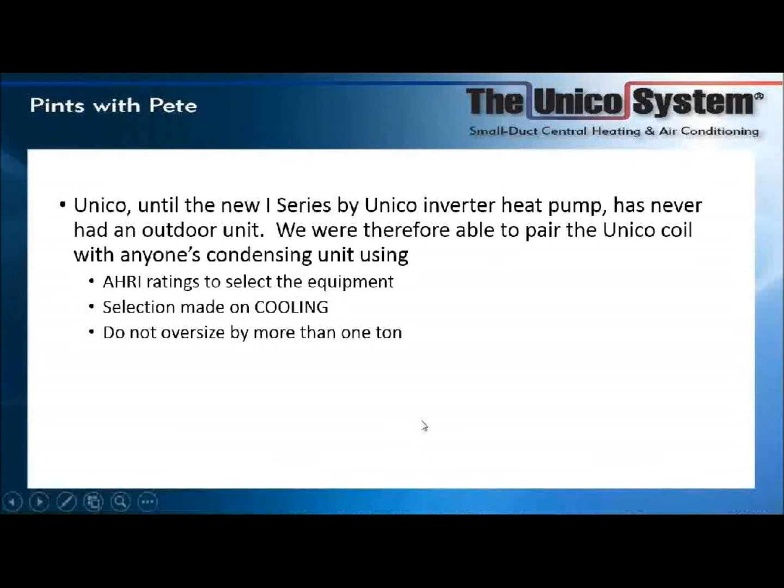And again, the thing is, a BTU is a BTU. One of the rules in our industry, this goes back to, I guess, when Willis Carrier was a child, is the sensible capacity - and I think you're all familiar with the terms sensible capacity and latent capacity. Sensible capacity is the temperature we feel. What we would do is take 1.08 times the CFM of air times the delta T, that is the difference between the incoming air and the outgoing air. That would give us our sensible capacity.

So when we give you a load calc, when we do jobs - when Victor Carroll does his website, does his load calculation for you - that's done in sensible. So we take that and multiply it by 1.3, or divide by 0.70. Now, we've always had a lower sensible heat ratio. We use about a 0.62 ratio. It used to be, before the advent of high SEER, the conventional systems also had about a 0.70 sensible heat ratio. That's risen to as high as 0.80 today. We're going to talk about that in just a moment.

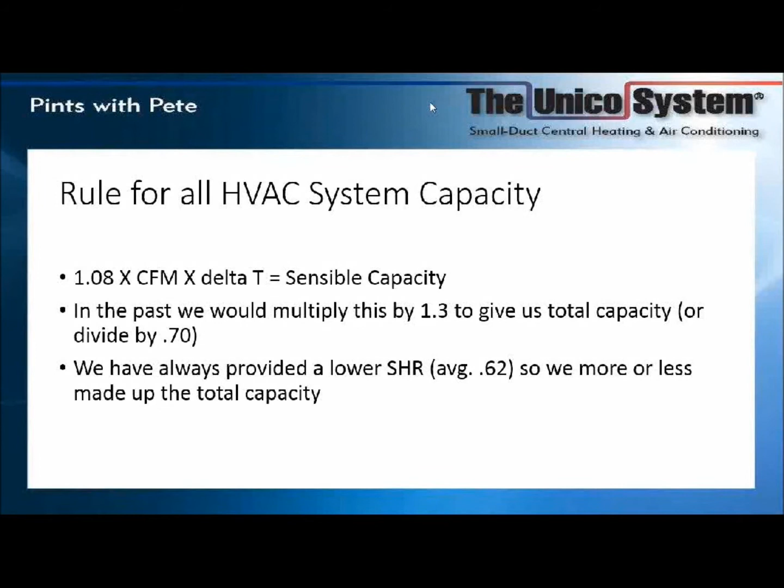So again, the first thing that you do is select the heat load capacity. And the AHRI ratings are 95 outside, 67 degrees inside. By the way, guys, I hate to mention this, but there are people out there that want to keep their house at 65 degrees during the summertime. Well, somebody needs to gently explain to them that's not air conditioning anymore.

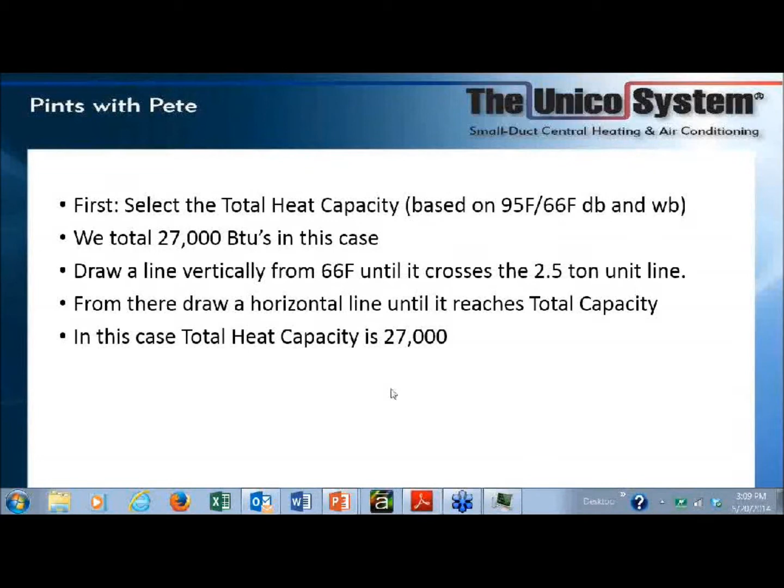So what we have in the next slide is a capacity chart. Pretty rare that we use these around here. But what we do is we take a vertical line from right here where it says 67 degree wet bulb. We pull this up to our 2.5-ton condensing unit, and that gives us roughly 27,000 BTUs. So that's how we determine the load.

Again, don't use this too often.

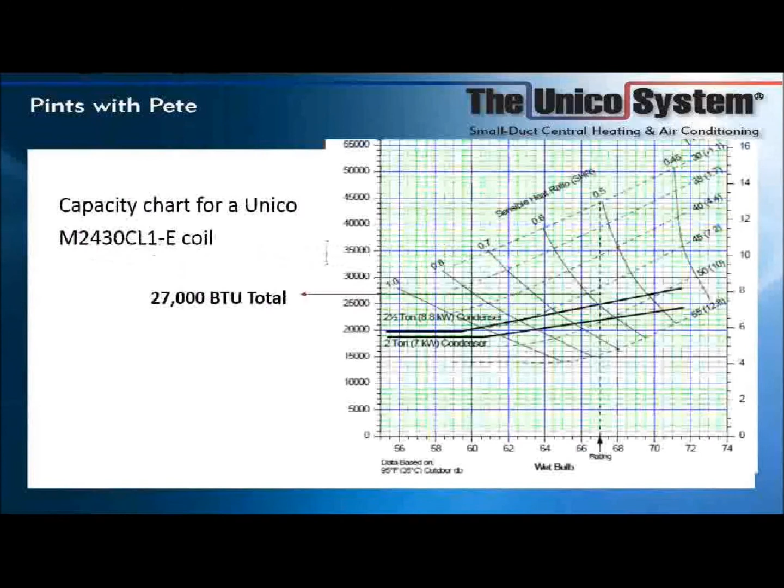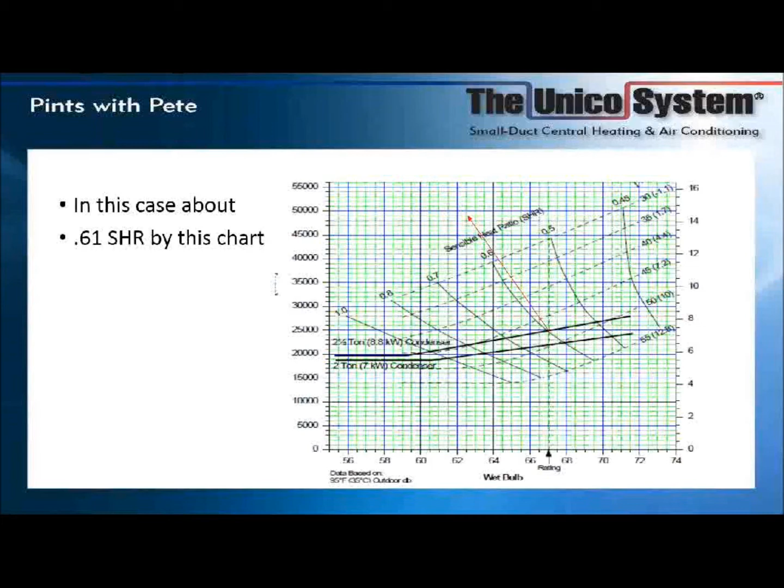The other part this chart shows is the actual sensible heat ratio. That can vary a little based on the condensing unit you're using, somewhere from about 0.6 to 0.62. In this case, you notice the line crossing the sensible heat ratio at 0.61, which is a little low for today's units—they're probably closer to 0.62. But you are taking out more humidity with Unico, which is a big plus almost everywhere, except a couple of places with dry climates, which we'll discuss later.

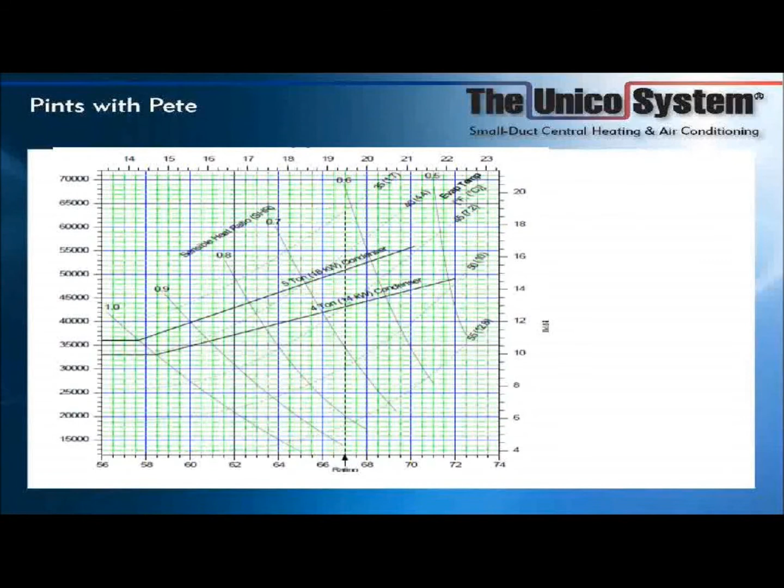Here's a capacity chart for the biggest coil we make, the 4860. In reality, this reflects a philosophy from Craig Messmer, our Director of Engineering: nominal condenser size is the size that manufacturer hopes the system produces. With us, a 2.5-ton system is rated at about 25,000 BTUs, whereas a conventional system matchup is more like 27,000 BTUs. In either case, you're not getting 30,000 BTUs from a 2.5-ton condensing unit, so it's a bit of a fiction the industry has agreed upon with nominal tonnages.

Quite frankly, if I'm doing a load calculation and come out with 24,000 or 25,000 BTUs, I'll probably just go to a 2.5-ton system so I don't get complaints on the 100-plus degree day that they can't keep the house at 68 degrees.

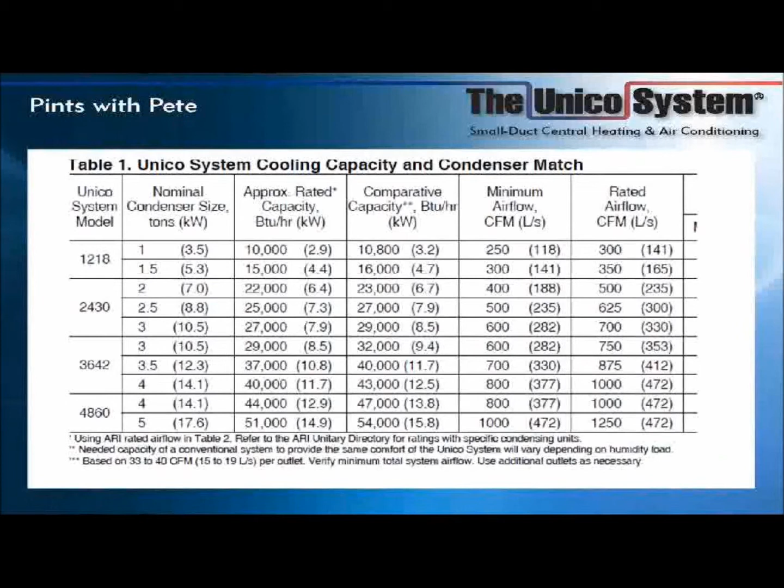So these are your expected figures, and this is, by the way, in our bulletin 40-40. There's a wealth of information there.

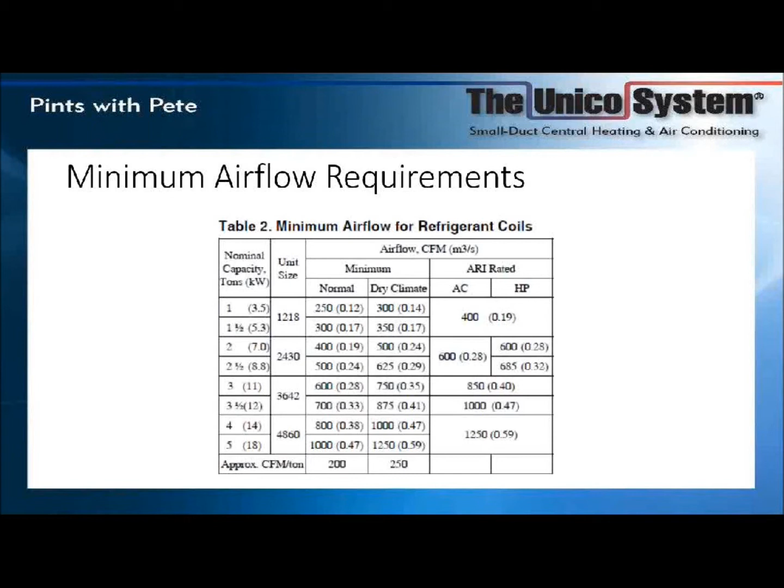If you've been to the other Pints with Pete sessions, you know this is very important to us—we have to have the correct airflow over the system. Over the last 20-plus years, the industry has mandated higher SEER: 10 SEER in 1992, then 13 SEER around 2006, and they're looking at even higher SEER now. What that's meant overall is smaller compressors and larger coils.

Here's something you wouldn't know unless you were with a manufacturer: the evaporator coil temperature on a conventional system has risen about 4 degrees, from around 44 to about 48 degrees. The discharge temperature, which we used to figure at 30-plus ambient when I was in school 35 years ago, is now about 15 to 20-plus ambient. The big thing people notice is that evaporator coils, both outside and inside unit coils, have become much larger, while we've stayed the same.

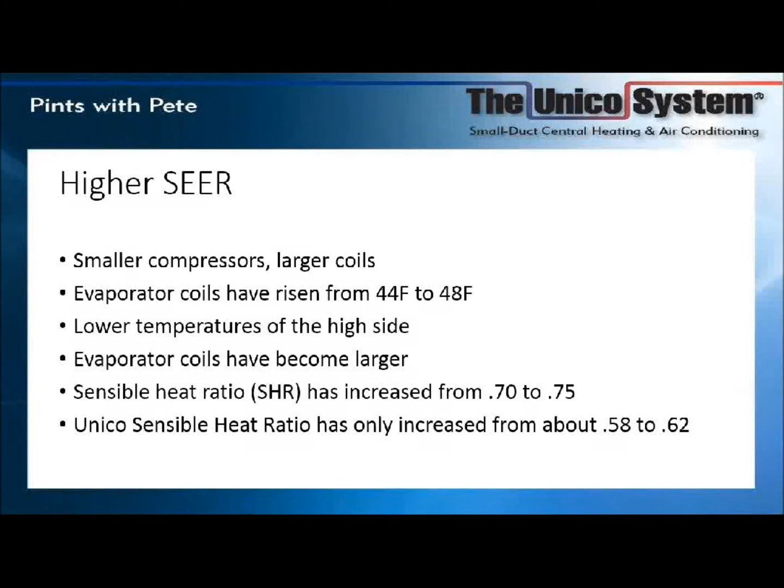So the sensible heat ratio has risen to about 0.75, maybe even a bit higher. Remember, we've only increased our sensible heat ratio slightly, from about 0.58 to 0.62, and our temperature has only slightly increased, from about 42 to 44 degrees.

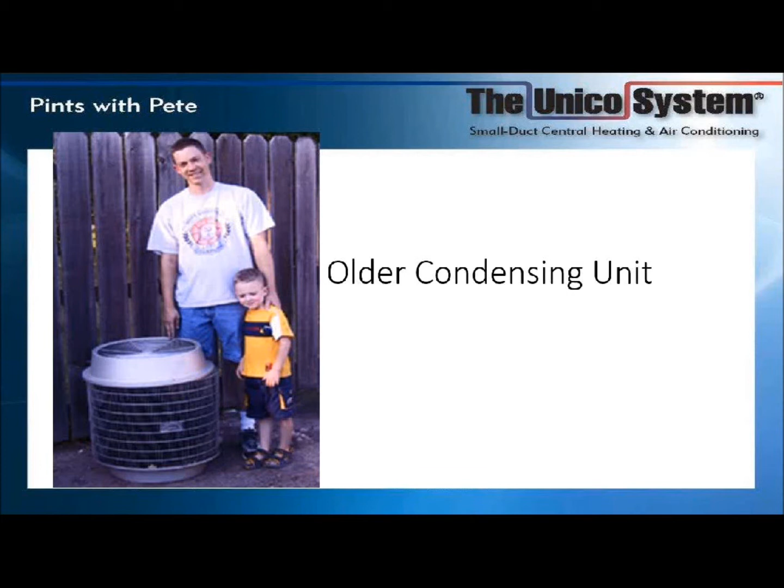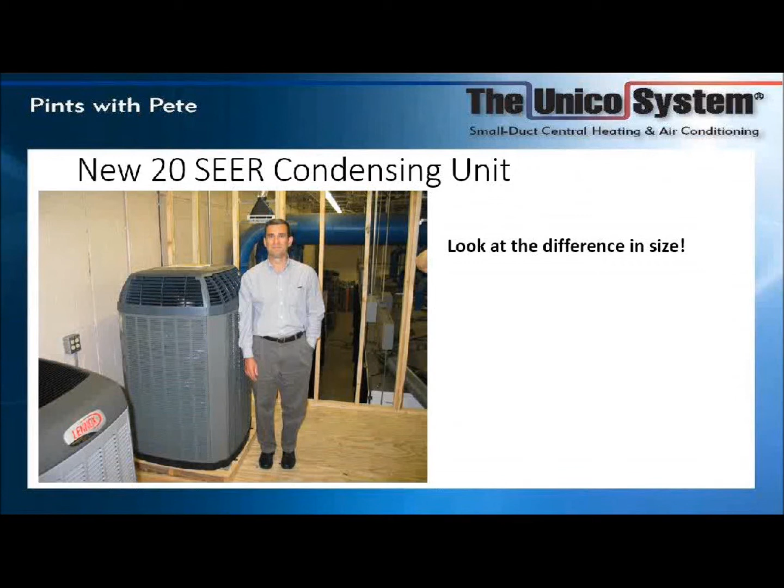So this kind of brings it home. I don't know how many of you were in the industry back in 1983—John Slack, were you out there doing this? This was a top-of-the-line Carrier Bryant condensing unit, a 3-ton unit. I'll show you the next slide, because that little boy is all grown up now—this is a 20-SEER condensing unit, and you'll notice it's enormous. That's also a 3-ton unit. If you look down inside, you'll see this little tiny coil at the bottom.

Now, Unico has always been a subject of space—we have much smaller spaces.

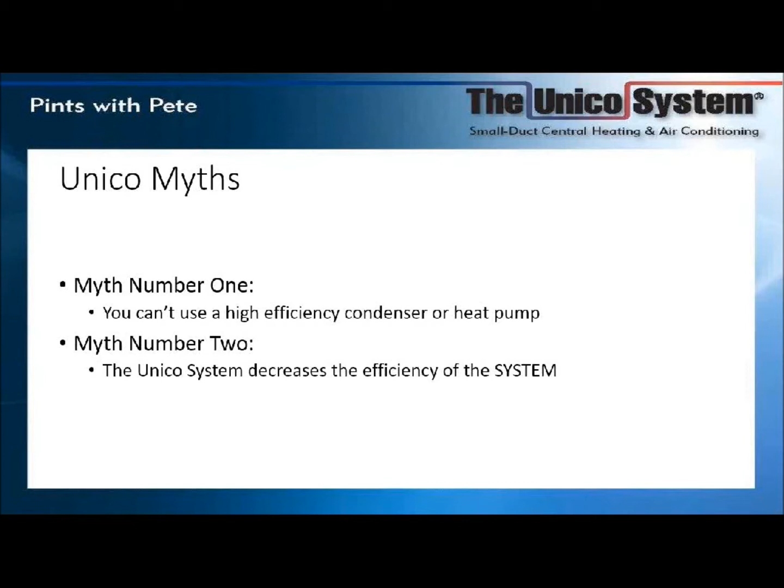A couple of myths have come up on matching systems. First is that you can't use a high-efficiency condenser or heat pump—you absolutely can, and I'll show examples of actual matchups with both 13 and 17 SEER rated units. Second is that Unico decreases the efficiency of the system. Again, SEER is sort of an agreed-upon lie—maybe I'm overstating it, but it's like EPA mileage estimates. If you have a Prius and floor it at every green light, you're not going to get the same efficiency. You have to look at the overall package, and that's not what the industry has done until now.

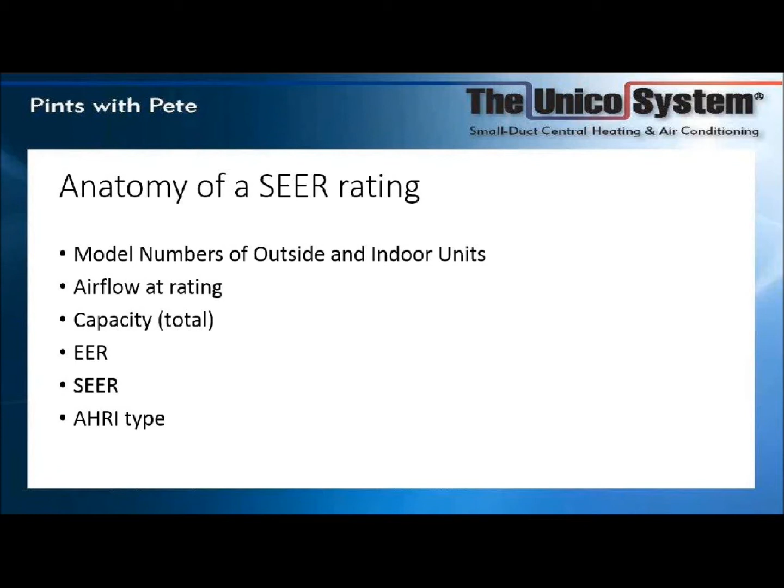So, the anatomy of a SEER rating: we have the model number of both the indoor and outdoor unit, we rate the airflow, and we show the total capacity. None of the manufacturers, Unico included, break it down into sensible versus latent. Everybody knows EER is the amount of energy you put in versus the BTUs you get out—that's a true number. SEER is kind of a blending, a smoothing. And finally, we come to the AHRI type, which with Unico is SDHV.

What happens with us with the ratings, and I've probably been through this a million times with most of you, is we have to rate our systems at 1.2 inches of static pressure. Conventional systems are rated at 0.2 of an inch static pressure, which is never going to happen in the field. We do have higher SEERs now with EC motors. The maximum rating we can have is 12.5, and that's with our I series.

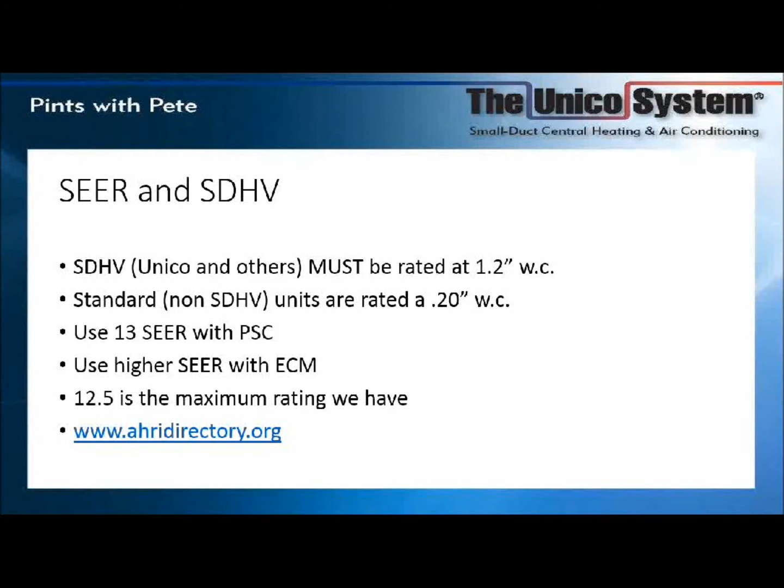Everything you do, you can check with ahridirectory.org. This is something we literally had an act of Congress pass last year. I don't expect you to remember this, but we are in Title 10 of the Code of Federal Regulations, Part 430, subparts 430.2 and 430.32c. I'm not going to bore you with the verbiage, but basically it recognizes, by an act of Congress, all the benefits that Unico does in terms of delivering the air and dehumidifying.

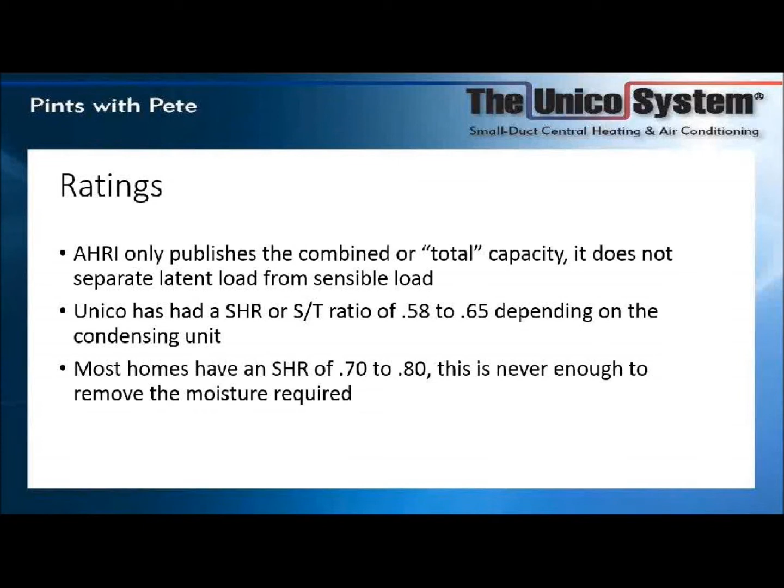They only publish total capacity. Most homes never have quite enough SHR, enough latent capacity, to take out the moisture. This is a little secret that we don't like to talk about.

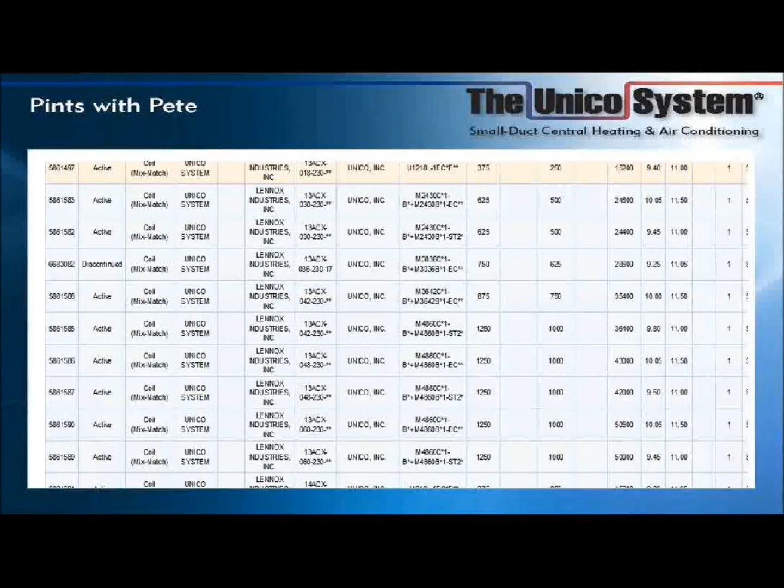Here you can see this is an actual matchup. You can see Unico hooked up with Lennox, and I only chose Lennox because we probably have the most matchups with Lennox out of any other series. You can see there's a total of about 85 of these matchups with current equipment.

So what we have, again, the actual AHRI certificate is available through us. And again, a little technical thing.

Can you see this? Can you guys see this? I got a question right here. 46 plus years, John — thank you. I think you just won the longevity award, unless there's somebody else out there. I want to close that right now.

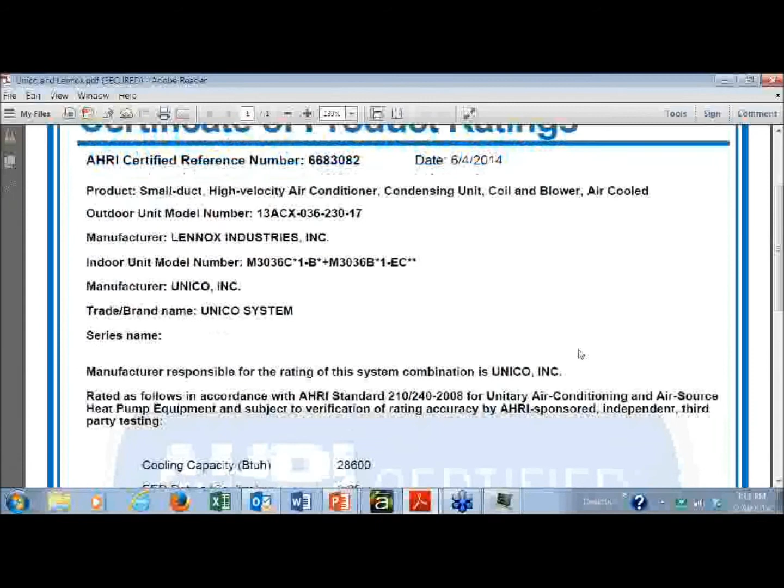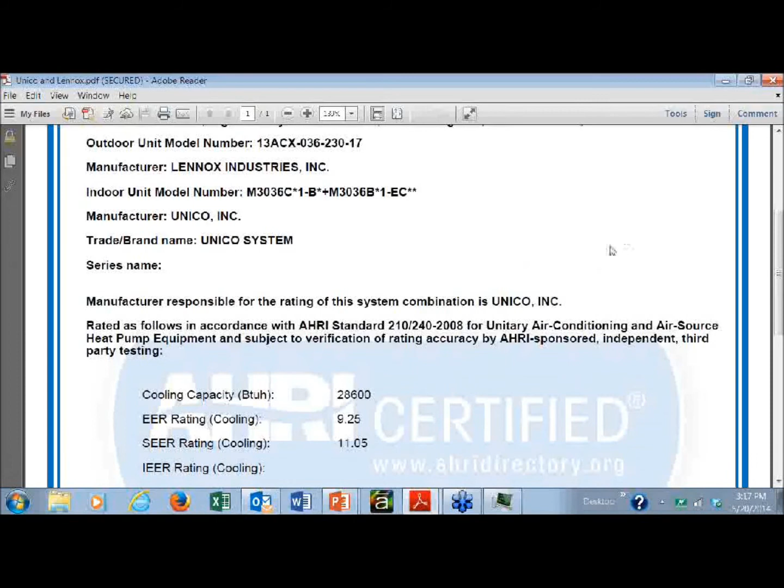But this is an actual rating here. We got a 13 SEER Lennox unit with the Unico 3036, and we're showing that we are actually putting out 28,000 BTUs. Now, the EER we have is pretty high, it's 9.25. But the way they do the ratings, we only get 11.05 SEER, which is all we need — 11 SEER. We're just not going to qualify for the energy rebates as of yet because we do things in a different manner.

So I'm not going to beat a dead horse right here, so we're going to move on.

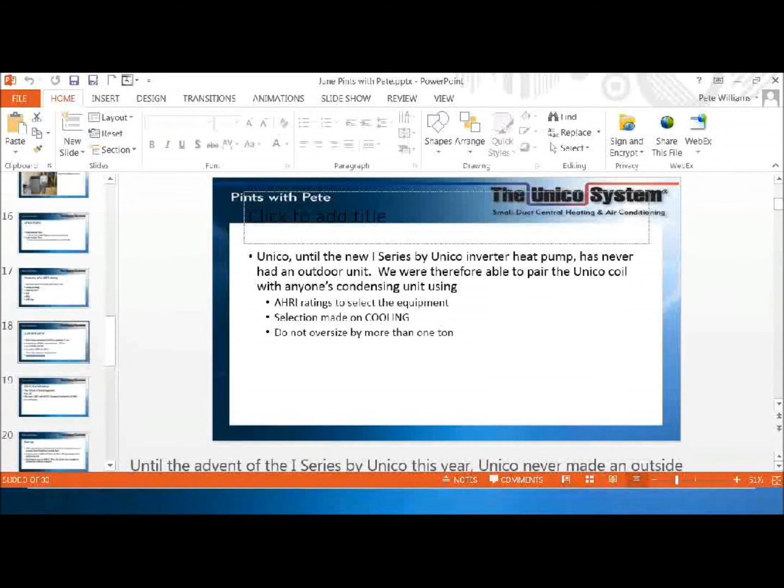So there's the actual AHRI directory. If you have a system that's not rated, and there's going to be a lot of them that aren't rated in the AHRI directory, it's just because of lack of manpower. We don't have the manpower to keep track of all the new changes that come out.

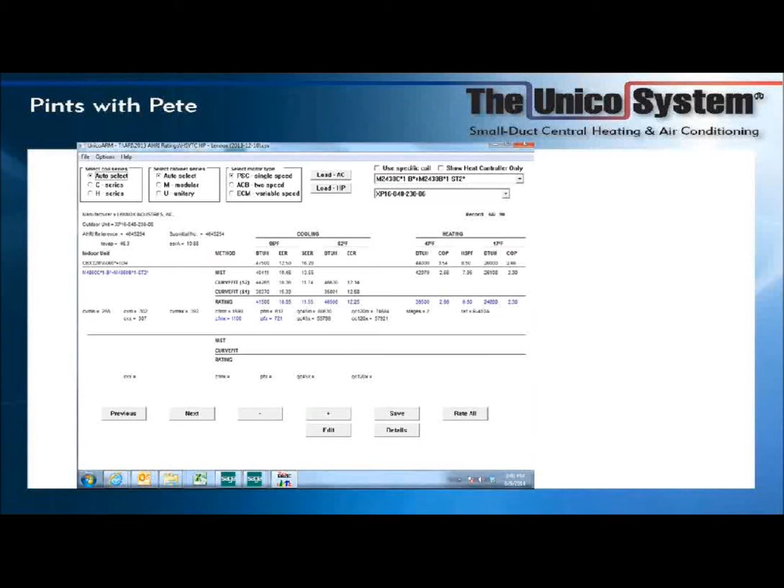So if you send us in, or just email us, a matchup, you want to put down your condensing unit model number. We have a software program in-house, you see this screenshot of it, and we can match up any unit that's out there. Again, it's just a fact that we don't have enough people to keep up with all the changes in the field.

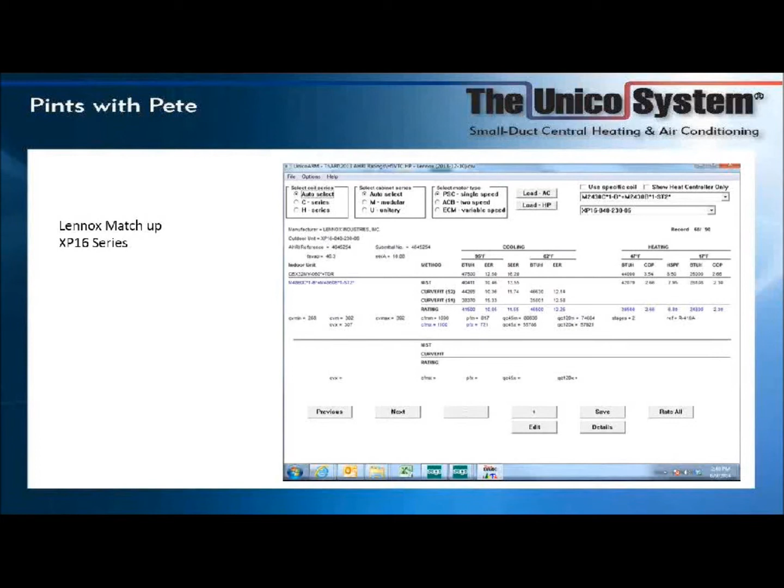So here you have a Lennox matchup. Here we are with the Lennox XP16 series, which I believe is a two-stage condensing unit, and we are rated on there. So again, we are able to use Unico with a high SEER unit.

Just to show you a comparison, this was with a Unico 3642. If you hooked it up to a 13ACX42, their plain vanilla 13 unit, we got 35,400 BTUs. That same model size, 3.5 tons, with the XC17, which is a 17 SEER unit, we get almost identical — it's within a rounding error on the BTU output, but the EER and the SEER didn't change very much.

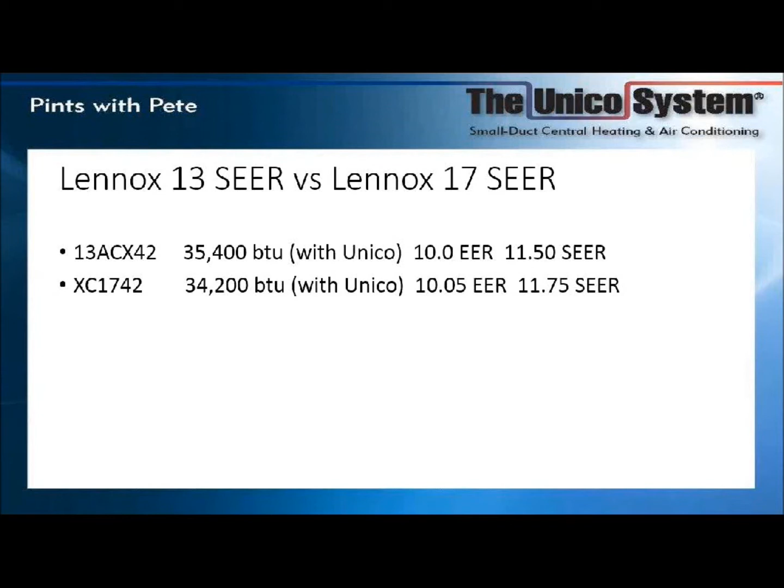So again, you can sell this with a 17 SEER condensing unit. It's just that we're doing things differently. As you saw in the size comparison, we have a very small system.

With heat pumps, you size those for the heat loss. The system capacity — what I mean by that is your total system, your Unico system plus your electric heat or your hot water heat. I recommend using auxiliary heat in most cases.

For instance, in places like Baltimore, they have very humid winters and a long defrost cycle. You can energize, say, 7.5 kW during the defrost cycle. Now, in my own house in St. Louis, with Unico, I've never noticed that cold blow when defrost comes on. I can only speak for myself, but you just don't notice it there. Although I've had some contractors in several areas that are very adamant on adding electric heat with us.

What I do is I use a heat pump, and I think some of you guys sell or represent this. I got the ecobee thermostat, and I set it to lock out at 30 degrees outside temperature. So I'm using just a plain vanilla heat controller, 13 SEER condensing heat pump unit. Below 30, it shuts off the compressor, shuts off the outside unit, and in my case, it turns on the boiler. And I think we all appreciate, now that it's June, what a brutal winter we went through.

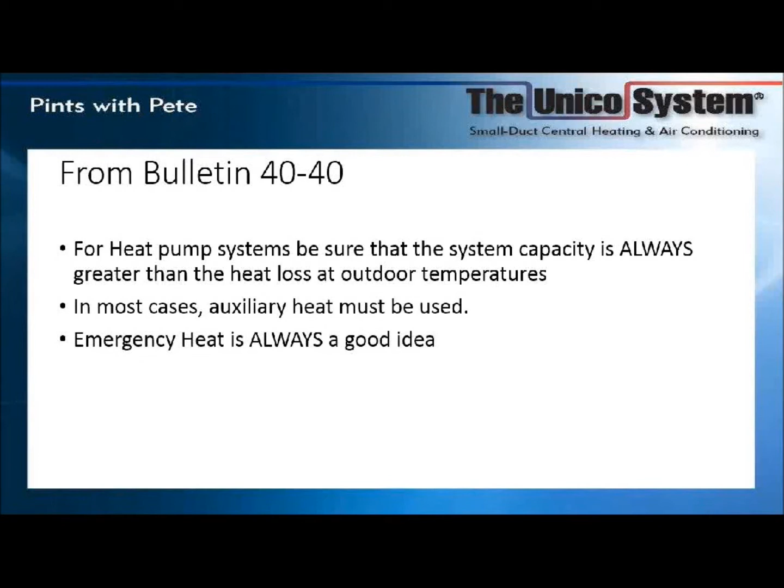Power companies have a saying that relates to COP, or coefficient of performance. You get $3 in energy for every dollar you spend on electricity when you're running a heat pump. Now, when we talk about the I series, we're good down to 5 degrees above, still producing somewhere around 2 or 3 COP. And we are still producing heat even as low as 25 below.

But again, I recommend emergency heat. Now, there is something with heat pumps that will vary. They call it a cross plot, and this refers to the balance point. The balance point is the level, and this depends mostly on the house and construction, on how tight the house was built. Typically, we used to figure 35 degree outdoor temperature would be where we would lock out the outside unit and bring on the boiler or electric strip heat.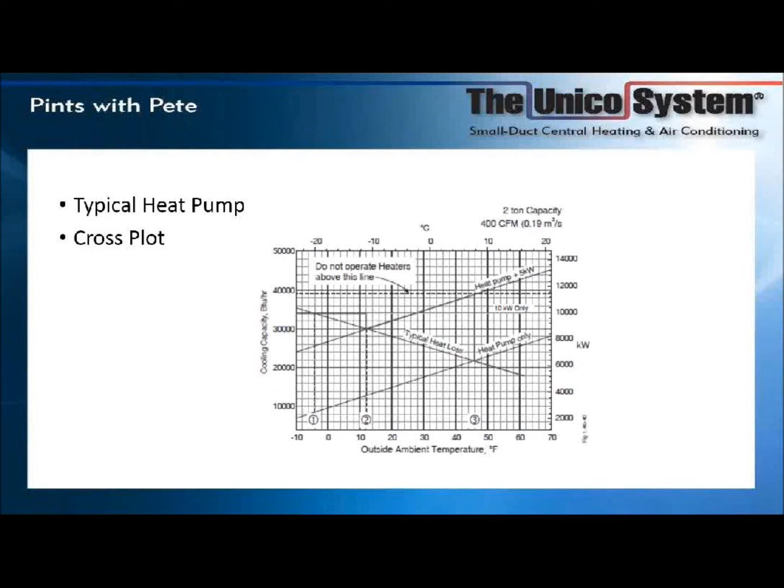We are using them colder today. There are a number of people that tell me with new construction, they have no problem running a 22 degree crossover point. But at some point, you do run out of BTUs. So the further north we go, the more essential it is that we have auxiliary heat.

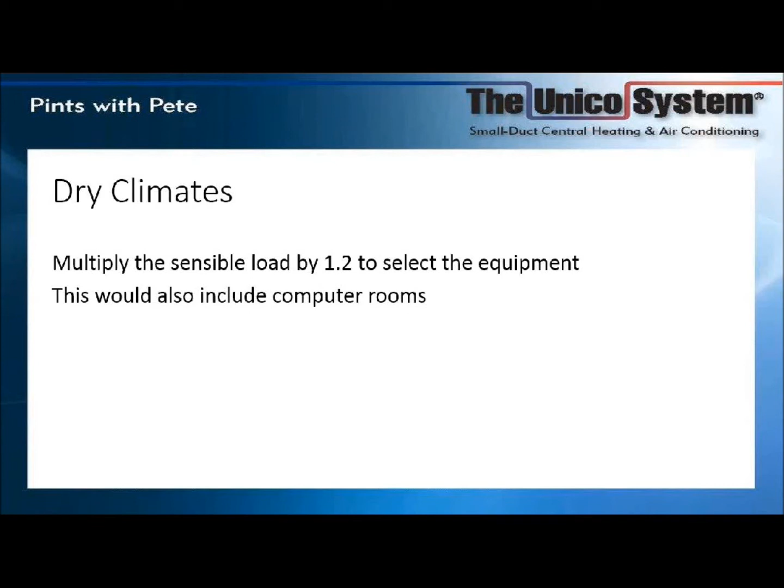One thing, I don't know if anybody is calling in from a dry climate. We really consider this to be high altitude and dry climate, so use Salt Lake City as an example. You have to, and this is true across the board, multiply the sensible load by 1.2. That would also include computer server rooms, which I know are a big user of the ductless mini splits.

So again, the I-Series has got its own condensing unit. We'll talk about that in another class; today was strictly on the Unico. If we do have a high altitude situation, if anybody's calling in from Calgary or Salt Lake City, you don't have 5-ton condensing units with us out there. A 5-ton unit is only going to give you 4 tons. Now, for the rest of us who don't live in the mountains, humidity is a big factor, and that's one of the things that the Unico matchup does very well. So basically, guys, we can use Unico with anyone's equipment.

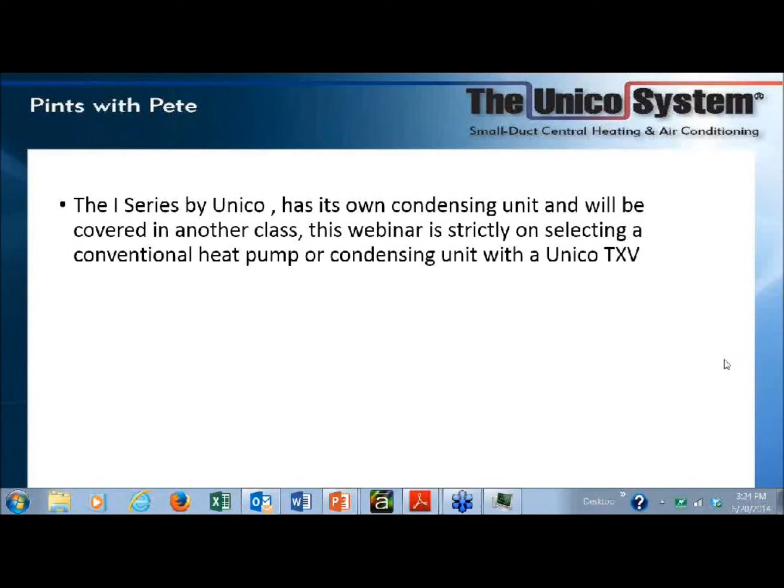100% Carrier, okay, very good. I think Carrier's our winner today. Again, we got a lot of people that use a lot of different equipment with us, and we're not really playing favorites with any brand. So as they say, if your brand out there is Broan, well, I'm going to tell you use Broan. Okay, we got a little bit of a change now on the poll, so we got a nice split between Broan and Carrier, and then about 60% using other systems.

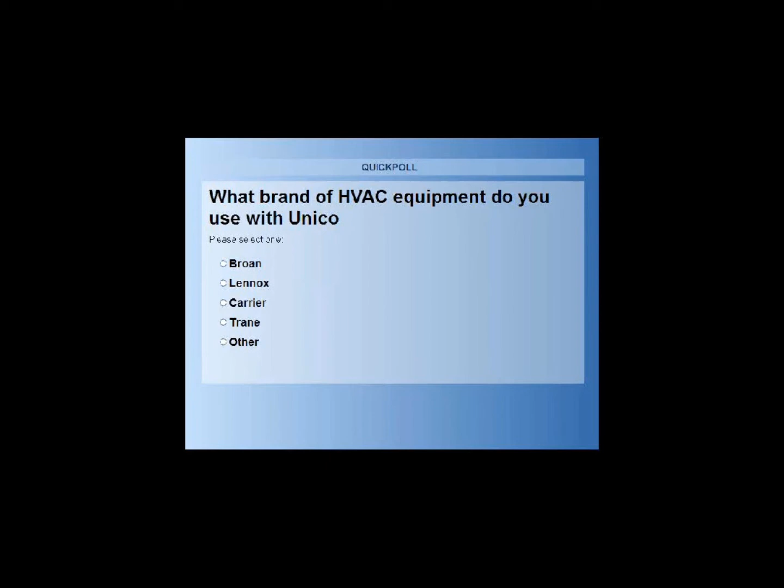Other ICP, well, again, we are friendly to everybody out there. We like everyone, and as I say, that's the beauty of Unico, is we're not interfering with your main line. That was a conscious decision they made all the way back in 1985.